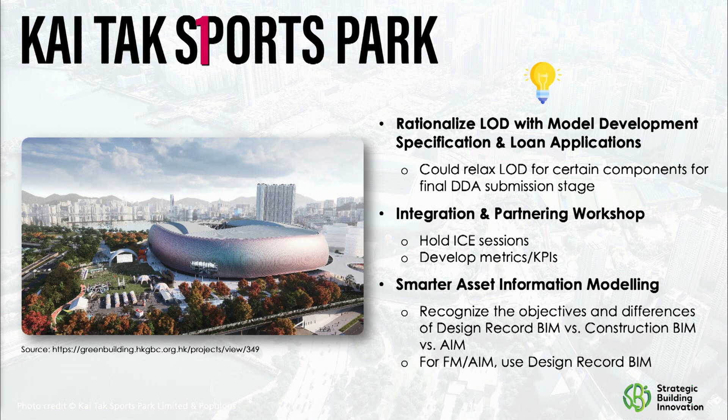One thing that should make this community proud is that when my team stepped in to meet with the project director of the Kai-Tak Sports Park project in Hong Kong, he did not take any of our courses, but he came into the room with the IPD book by Martin, by Dean, by Atul, by Howard, telling us how not only did he follow it and read it, he's actually embracing it. The book was with him in the trailer. So that was very, very impressive.

But for this kind of project, which is 4 billion US dollars, working with hundreds of consultants from Australia, the US, and across Asia, there was still quite a lot of challenges in terms of production. So what our team ended up doing was really help them understand that the owner had come up with too lofty, too ambitious requirements for the level of development of the production schedule.

And in the end, we were able to see that they were able to gain some VDC benefits, which you can read right here, through automation, through better production planning, and of course, good use of BIM.

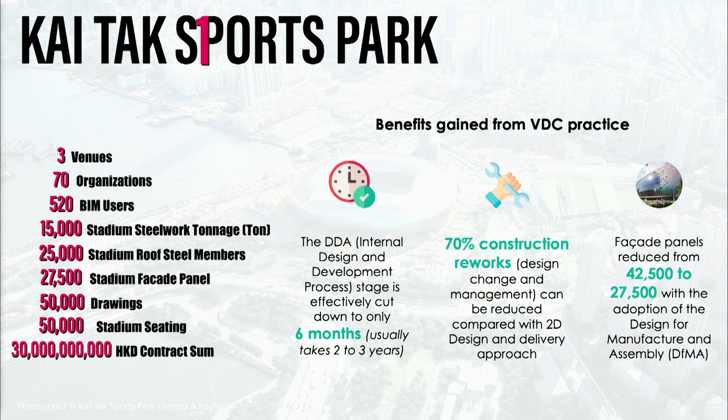Next slide. And what we found was that it was very important for us to have a session with the government agencies on this 30-year design, build, and operate job, and be able to articulate what would be the client objective, the project objective, how we can make it understandable, not just what the original consultant wrote a few years ago about the lofty ambition of the project, but how to really make it a smarter stadium project.

I still remember working with Jim back then on the California Academy of Sciences project. There was not much definition about LOD, about reliance of BIM. So Jim, reflecting on the last 20 years and looking forward, what have we learned?

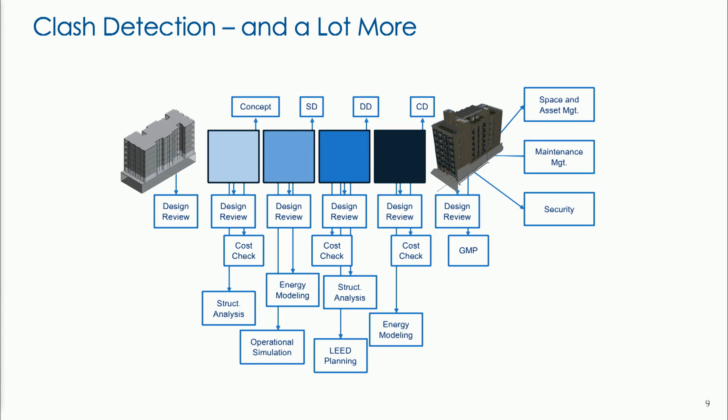And the first people to adopt it, at least in the US, were the trade contractors, because they saw this as a tremendous way of coordinating our work. It worked much better than the old superplot method. It worked well enough that I was working with Webcor, the general contractor on this project at the time, and shortly after this project, a couple of our trade contractors came to us and said, if you require all the trades to produce 3D models like this, we'll give you a lower bid. So money was already talking.

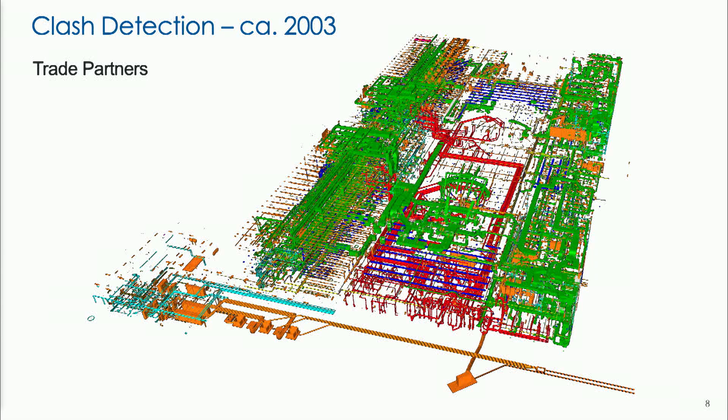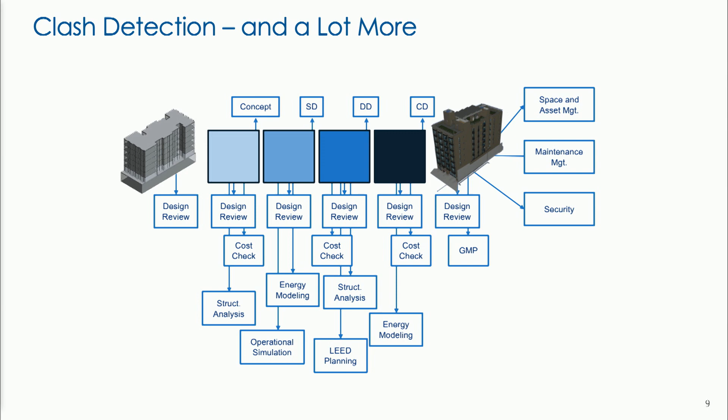Obviously we've moved on. We're doing a whole lot more than clash detection now. There's various simulations we're doing—costing, scheduling, operations, and so on.

But can we really rely on these models? If I'm a builder and I get a model from the architect, can I build from it?

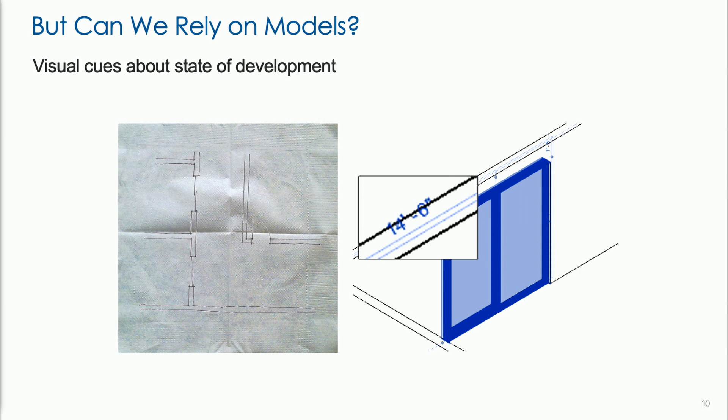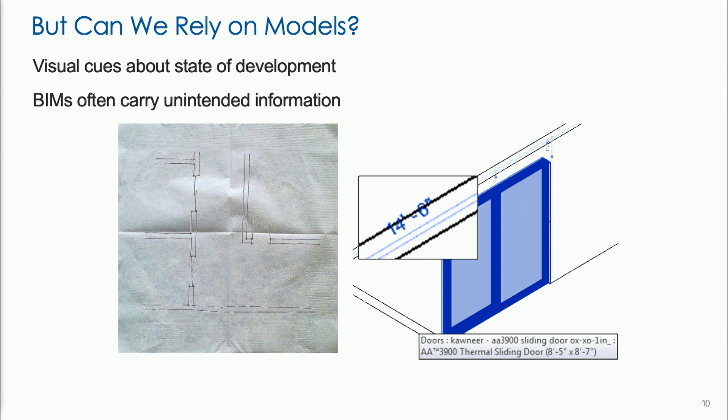And this is a BIM problem. We didn't have this problem with drawings. One of the major problems we ran into was that we lost the visual cues on the state of development. In drawings, if the thing looked like the thing on the left, we knew everything was approximate. The problem with models is that whether we're at the napkin stage or 100% CDs, it always looks like the thing on the right. I can measure the location of that door, but if we're at the napkin sketch stage, that location is probably going to change. They often carry unintended information—I probably grabbed that door out of the library just as a placeholder, and it's going to change.

So the response to this has been, when somebody hands a model over to somebody else, they put this disclaimer on it: it's for reference only, you can't rely on it. Really the theory behind that disclaimer is some of the information is not reliable, so don't rely on any of it. When we got hold of this in the AIA Documents Committee, we developed a specified use approach—basically said, yeah, some of the information is not reliable, so only rely on what I say you can, for the purposes I say you can, and to the degree of precision I say you can.

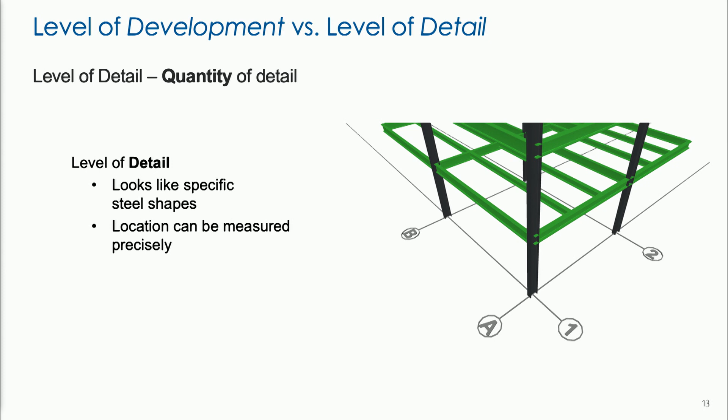And that's when the AIA Documents Committee developed this idea of level of development. The difference then is level of detail is really the quantity of detail—how much is there. But this thing on the right has a high level of detail. It looks like specific steel shapes—probably is, because I probably grabbed them from a library, didn't build them myself. I can measure the location precisely, but have they been engineered, and are they in the final locations? I can't tell by looking at that model.

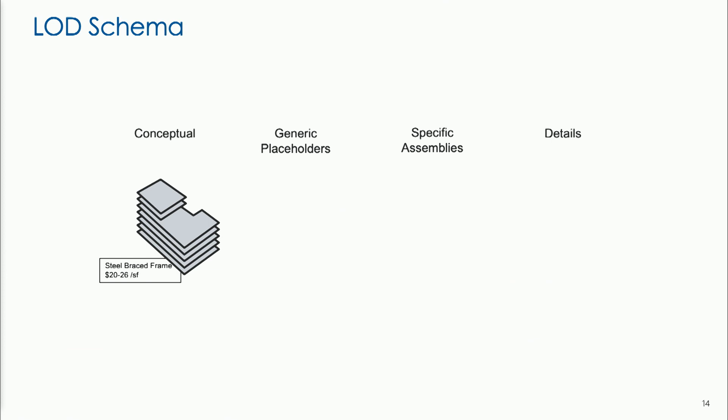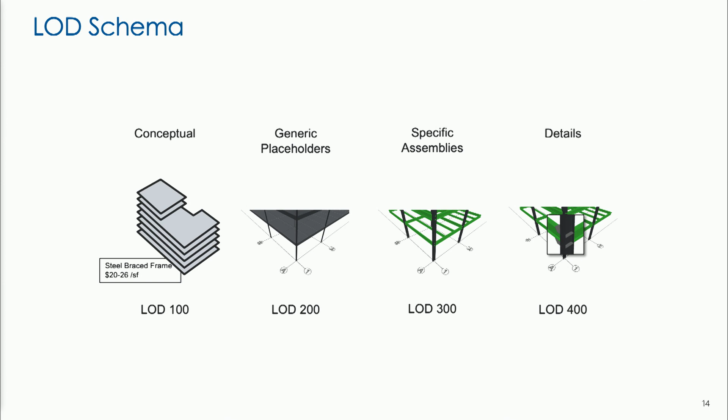So things progress through the design process at various rates. The structures usually lead everything. Things like interior casework bring up the tail end. But they all tend to hit common milestones. You start with a concept, put in some generic placeholders, swap those out for specific assemblies, and some of them you take to shop drawing level details. So we labeled these milestones LOD 100 through 400, and now we have this schema that represents the reliability of the detail.

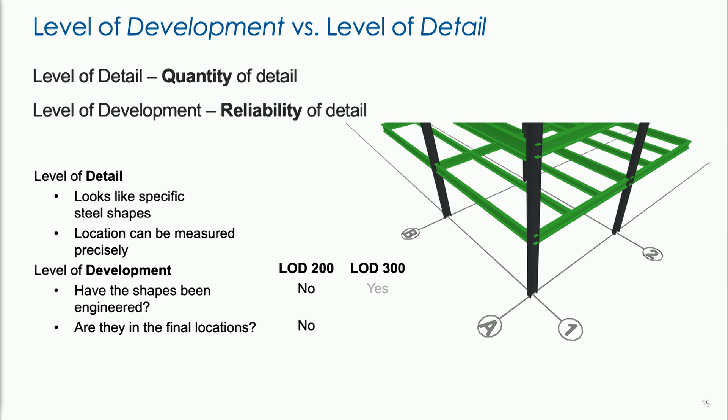Level of development then answers these last two questions. At LOD 200, the answer to both questions is no—they haven't been engineered, they're not in the final locations, so I can't rely on it for that. At 300, the answer to both is yes.

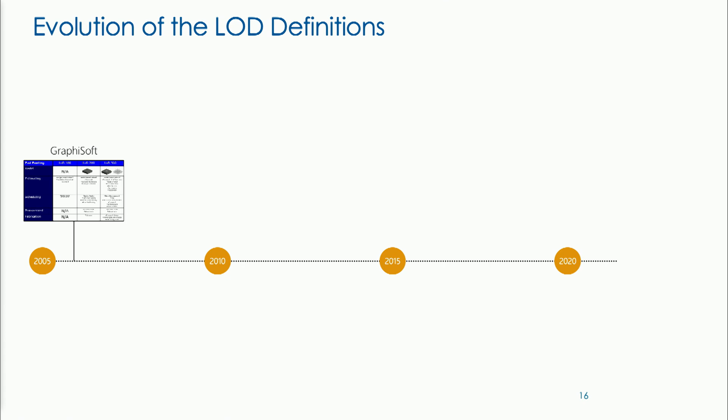The evolution of these definitions was, first of all, Graphisoft came up with this level of detail scheme, and it went on to, when the AIA got a hold of it and morphed it into level of development, a couple of updates, and then the BIM Forum, an interdisciplinary group in the US, got a hold of it and made this LOD specification, which we'll detail in a minute.

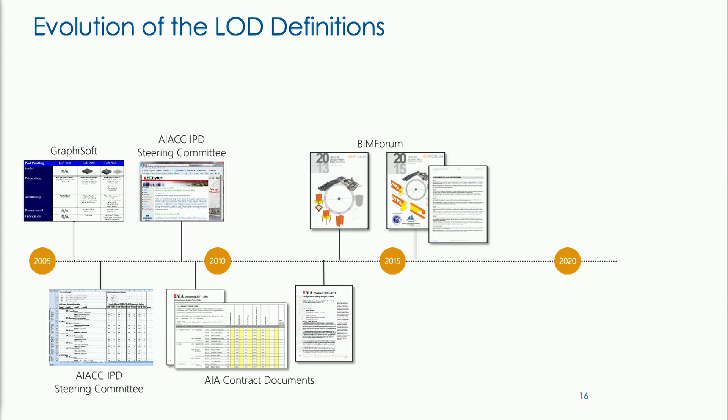One of the major developments was that in 2015, the BIM Forum took this and interpreted these definitions. The big one was that we said, okay, since 300 is specific assemblies, we can measure it. Caused a lot of heartburn among architects at first, but those that really saw what was going on bought into it.

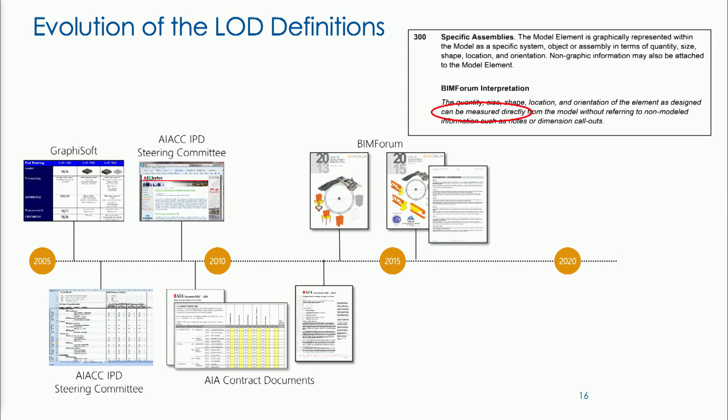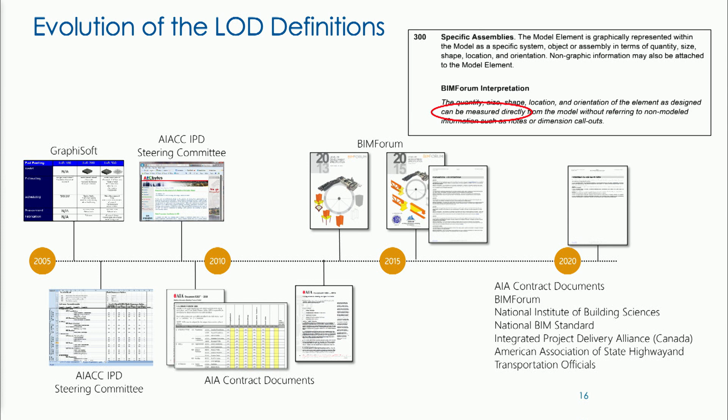Last summer, we got together a wide group of industry organizations, redid or updated the LOD definitions, and basically baked these BIM Forum interpretations into them, including the measurability of 300.

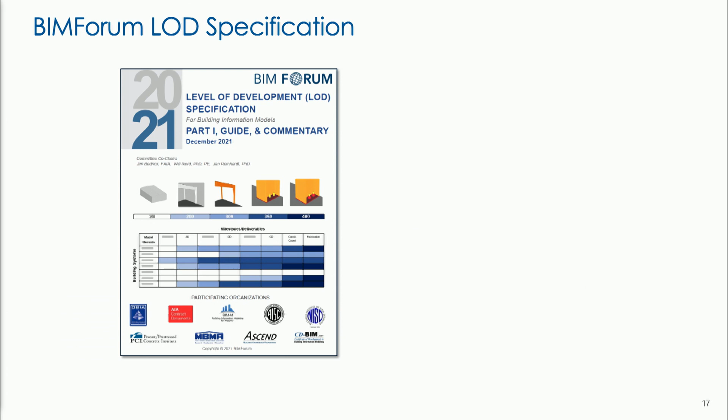So, all right, this is fine. We've got these definitions, but still, what I think of as a 200 door, an LOD 200 door, might be different than what you think, okay? So the BIM Forum got together and developed this specification, basically as a dictionary. This document interprets various and sundry building systems at the different LODs. So now, if I want certain information on a door, I can look in here and say, okay, that's LOD 200. I can tell somebody else that I want LOD 200 doors, and they can look in here and know exactly what they need to give me.

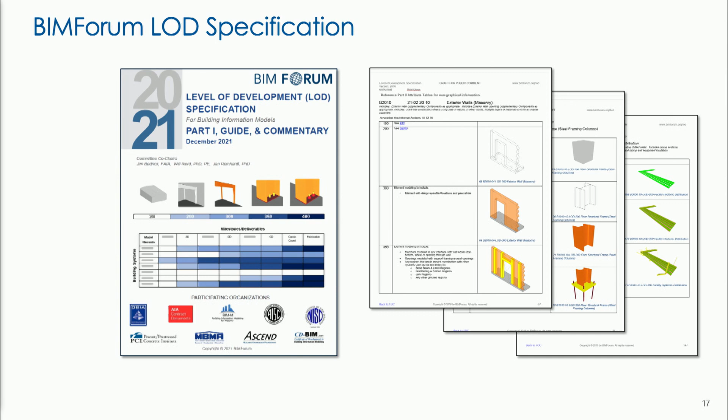A couple of years ago, this started to go global. NBS from the UK came to us. They said, we think you've got the best LOD framework and specification. We have a breakdown system that we are going international with, Uniclass. So we want to map your specification to Uniclass, which we did. In 2020, that mapping came out.

Now, the spec and the definitions and the whole framework of LOD has been a tremendous support for collaboration. Well, what's next, as far as reliance on models goes?

Well, how about models as contracts? If you look at the evolution of contract documents, a while back we were doing drawings, separate drawings. You move a window on the plan, you got to go through half a dozen drawings and move it there.

We progressed to taking drawings as views of the model. Now I move the model, the window in the plan, it moves in all those other drawings. The thing is, if you look at that small apartment building, 152 of those sheets came directly from the model. Why are we composing all these sheets?

When we took this on in the AIA Contract Documents Committee, we started in 2013. About half the group said, okay, well, we can look into this. The other half said, no, never. Over my dead body. We're never going to make that model a contract.

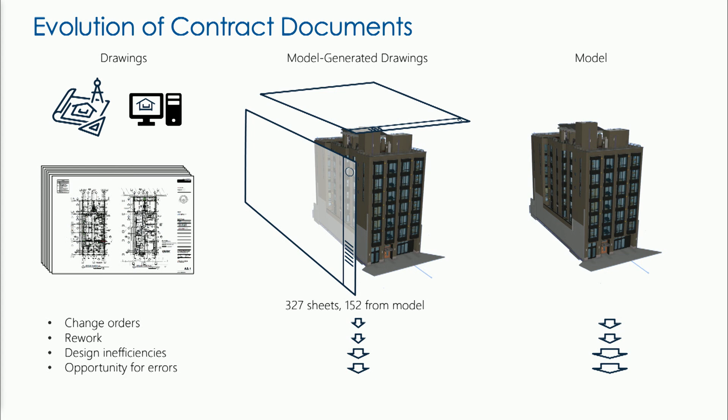One of the people who was most dug in against the idea wound up being the lead of the document that supported it, because he took a look at it and he said, you know, this is going to save me a lot of time. I don't have to compose these sheets anymore.

And the thing is, it's not the next step, it's happening now. Especially in the horizontal industry, it's happening so much that they have their own acronym for it, MALD, Model as a Legal Document. Four states are planning for it, four are conducting their first pilot, and six have designed and constructed a project using models as contracts.

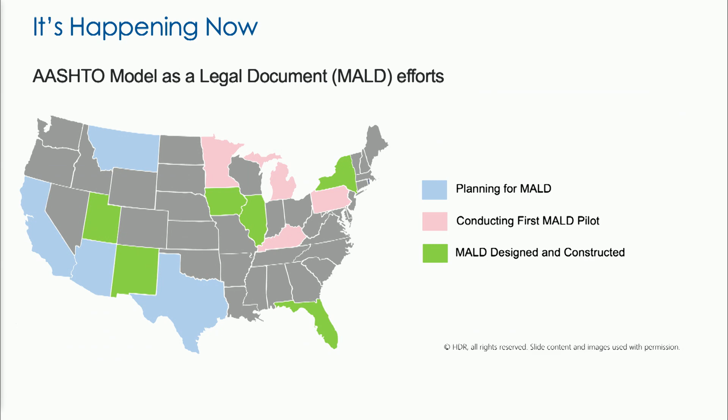It's also now gone into the vertical sector, and last summer, AIA came out with the latest BIM exhibit, and it specifically supports the idea of a model as a contract.

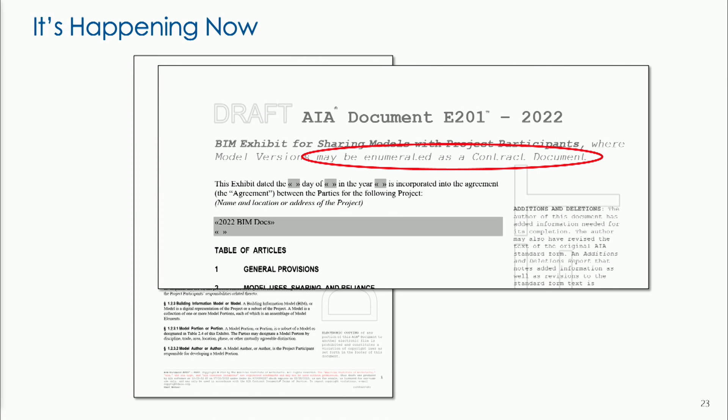Okay, now scaling up BIM to GIS. One of the work that we're doing at SBI is integrating BIM and GIS, but not using native formats like Revit or Tekla, but we are using open formats like IFC and CityGML.

The main reason is it's usually the government agencies that need integration with BIM and GIS, and they tend to have, in the future, probably in a Hong Kong case, 300,000 models, because they do have a lot of facilities in the city. And it should be speaking in the same language. If some models are built with a Tekla language and some models are built with a Revit language, it will be very difficult to do anything and query information.

So you need a consistent format. That's why we are using OpenBIM and open standards for the GIS as well. And on top of that OpenBIM and OpenGIS platform, what we are doing to improve the quality of the BIM is also using Building Smart's new machine-readable specification called IDS, Information Delivery Specification.

The intention is you can create a model checker within Revit, for instance, but you cannot really export that rule set to a different software like ArchiCAD and use it again. So the intention is to make this rule set interoperable between different BIM authoring tools, so you can use it for multiple purposes and by multiple stakeholders.

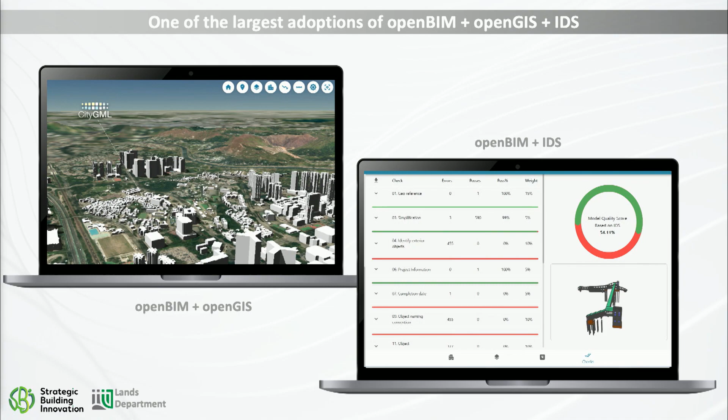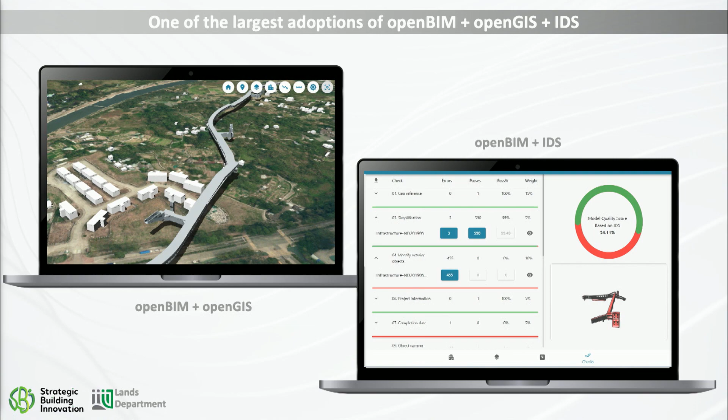So this is the prototype platform that you're seeing on the left side. It's done with our Dutch partners, and this is using open standards pretty much 100%. We have IFC in here, we have CityGML for the GIS part, and for data streaming over the internet we use GLTF, Cesium, and 3D tiles, which are also open standards. And on the right side, that's the IDS checker, if you will.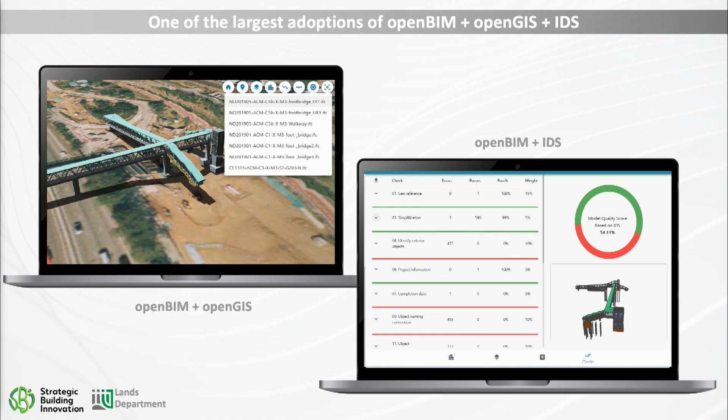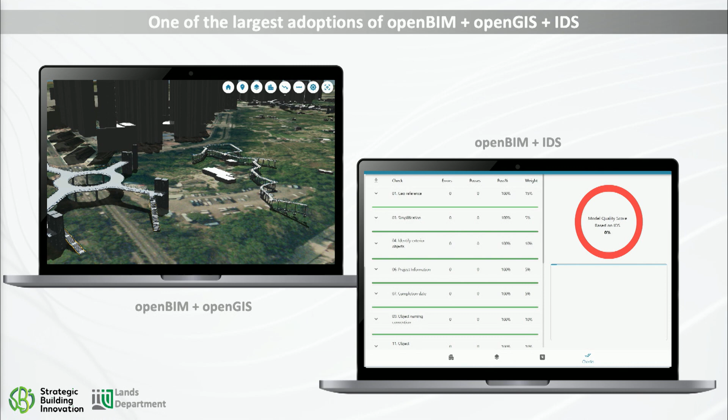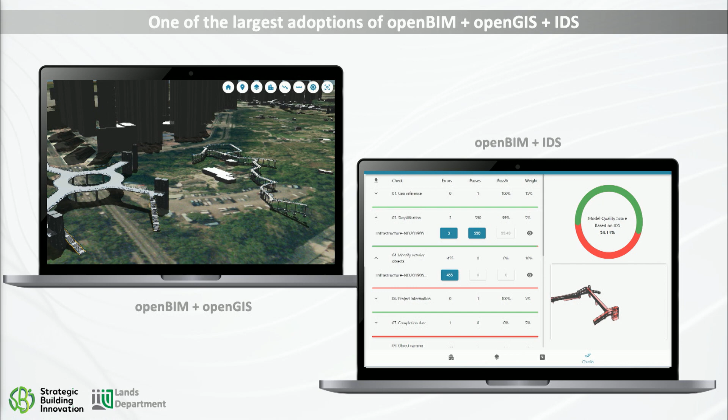It's like a model checker that's using the machine-readable format IDS XML. Here, the information requirement for the government agency is on a high level, like whether you have the georeferencing information embedded in the BIM or not, and whether the model is simplified or not. Because when you have 100,000 or 300,000 models in a platform, it should be very light and maneuverable. So simplification is another example of a requirement for this project.

So some metrics in this project: we used 7 open standards and developed 10 IDS file formats for different checking purposes. We also tested that IDS checker, or basically the model checker, with 149 IFC models. Of those 149 IFC models, 102 were infrastructure project models. And when we ran this IDS checker, on average it took only about 12 seconds, so it was very usable.

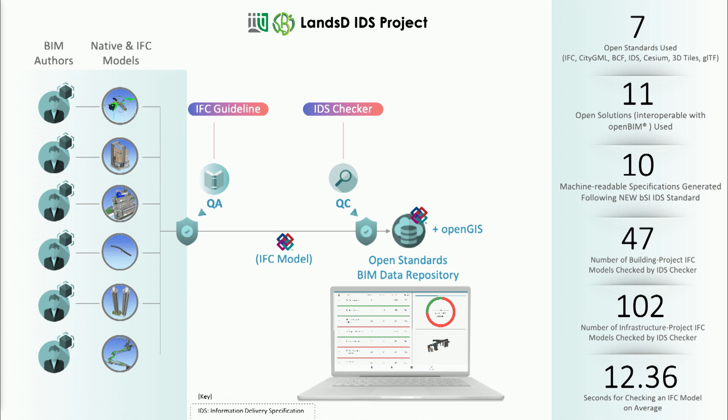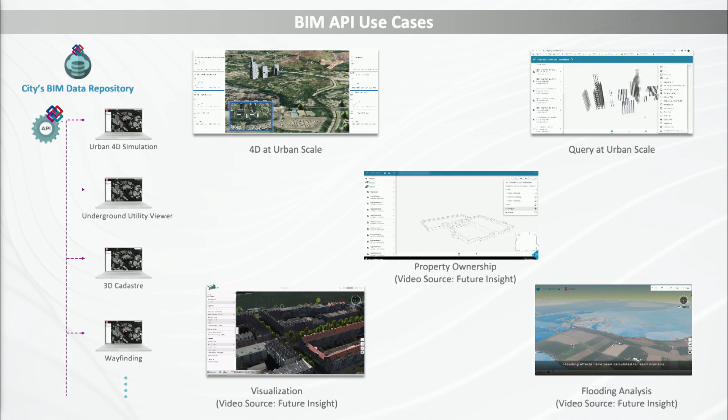Moving forward, what we plan to do is address the fact that a lot of people tend to think IFC is an archiving format, but we are also trying to leverage IFC-based APIs. So some of the examples that you see here are all software developed using IFC-based APIs.

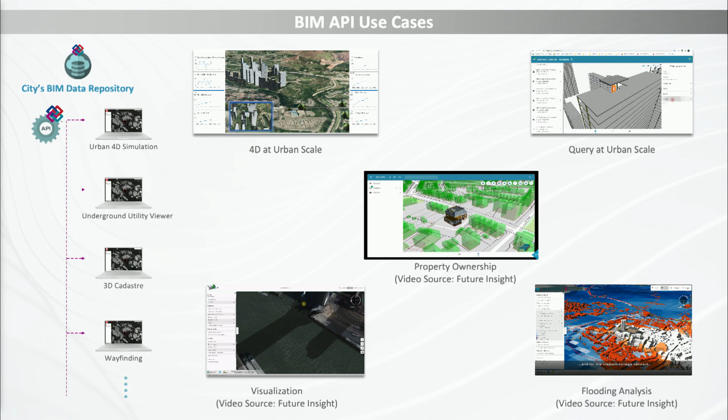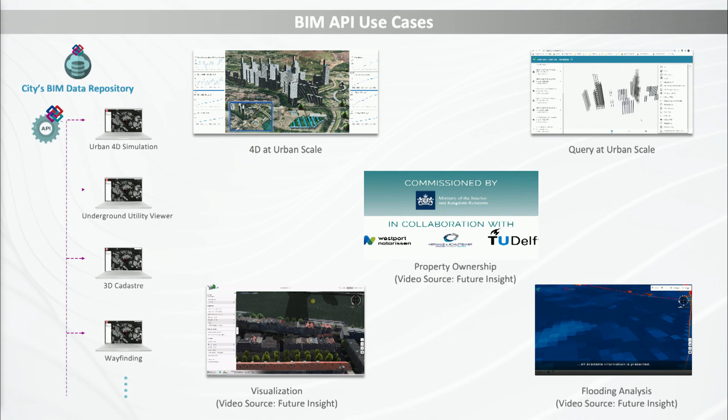The 4D simulation case on the left side was inspired by research work done at CIFE more than 10 years ago. And you do have other use cases like advanced query, querying against the city model as a whole, and also flooding analysis, which integrates with another flooding analysis engine by using APIs, which is an IFC-based API.

Moving on to the production management side of the VDC framework now. So this is actually work that stemmed from CIFE Stanford. And the planning level that we are interested in is similar to what Lupo talked about when he discussed lean to field. So it's not about master scheduling or phase scheduling, it's more about the scheduling or last planning system for the site people, like the foreman.

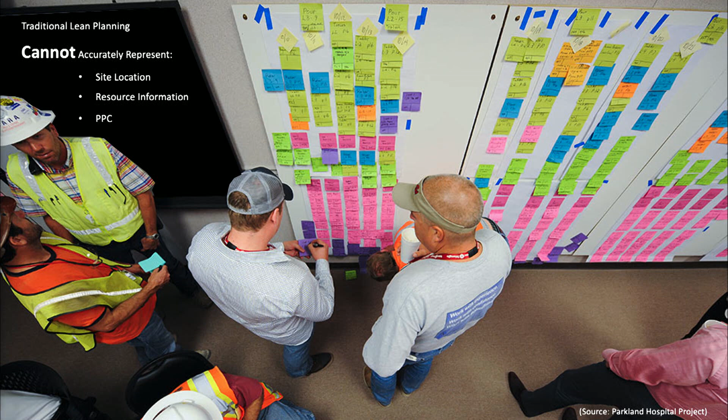Typically what we see in the industry today is this type of physical board with sticky notes. Those sticky notes will tell you what the foreman has to do on a certain day. It does have some information, but it lacks detailed, precise information in terms of resources, like quantities and whether the equipment is available or not. Also, the PPC is calculated on a very rough level — they just count the number of sticky notes, not really based on a BIM-based quantity type of metric.

So this is the research prototype that was built at CIFE. We do have LOD 400 BIM here. Of course, we are not asking the industry to go with LOD 400 for all of their projects, but if projects do have LOD 400, they can leverage this information. So we're using LOD 400 and building a production unit boundary, an imaginary boundary, to encapsulate the work scope of the foreman for that day. By using that, we can also quickly generate daily work orders, which have precise and accurate quantity information coming from BIM LOD 400.

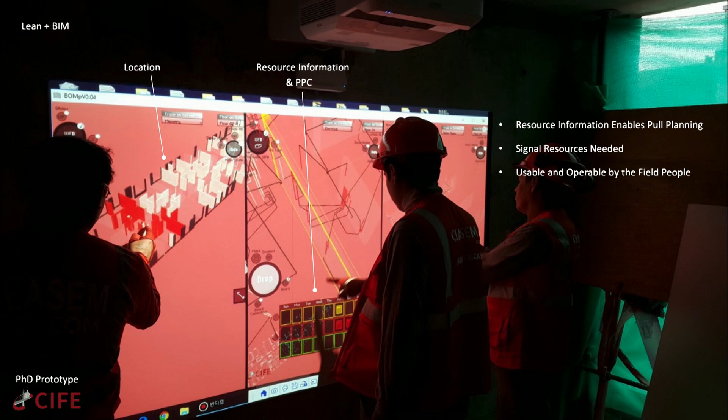During the study here at Stanford, we did test this out in North America, South America, went to the Middle East, went to Europe, and did a lot of test cases. At SBI, we extended this and now implemented it in Asia, so we did test this in Hong Kong as well.

It was a high-rise building project with the curtain wall trade as the focus of this test run. For the curtain wall trade, we implemented this for 6 months and generated 143 daily work orders. On average, it took around a minute to generate a single daily work order.

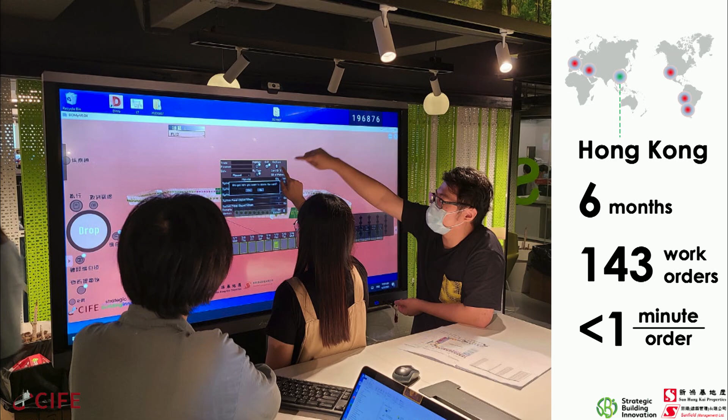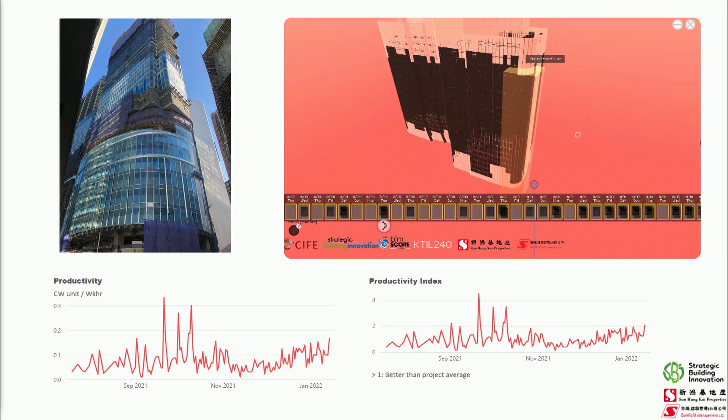So this is the 4D simulation of the work done in Hong Kong. This is a high-rise building project, and each of the black cells you see is a curtain wall unit. At the bottom, you can see the productivity and the productivity index metrics. One thing you can see is that variability of productivity reduced over time. Whether that's due to this platform or software, I don't think so, but this software does help you visualize that variability over time.

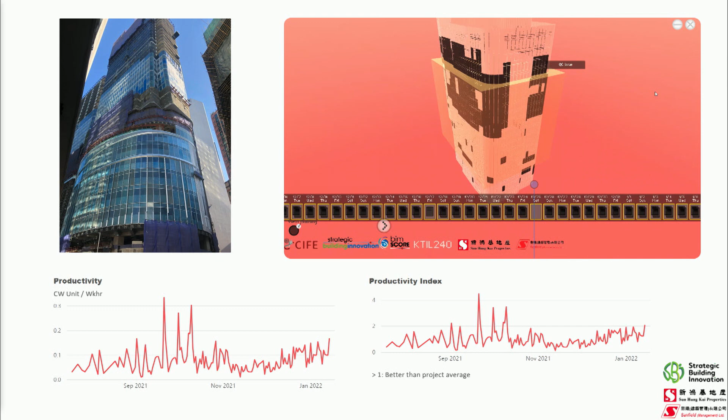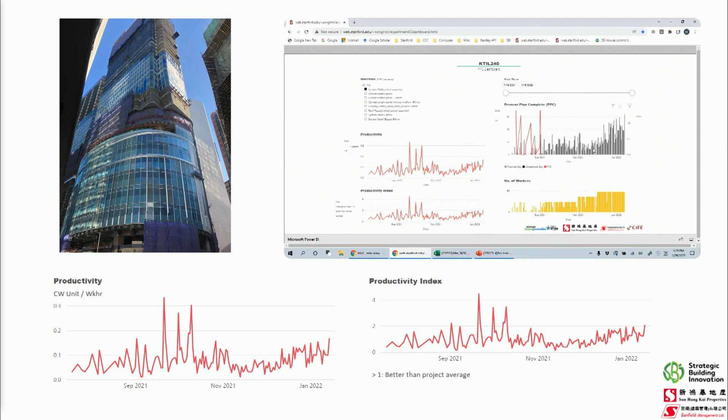In addition to tracking the work done at the construction site, we also try to track the supply chain - tracking whether the prefabricated unit has been completed or produced at a factory, and whether it has been delivered to the site or not. So that part of progress tracking has also been implemented in this case.

Some room for improvement: a lot of the success of this depends on cooperation from the site. At this project, the site people and the foremen were not fully cooperative. So one way to work around this is to build into the information requirement that subcontractors and foremen should be inputting this type of information on a daily basis. Because if it's not in the contract or information requirement or specifications, they tend to overlook this type of work.

Another room for improvement - we did manage to help foremen generate these daily work orders quickly, on average in a minute or so. But a lot of things we've been hearing from foremen is, can we automate the update of the progress? We do have a lot of technologies we can leverage today, like RFID and computer vision, so that it can automatically detect the objects or elements installed at the site.

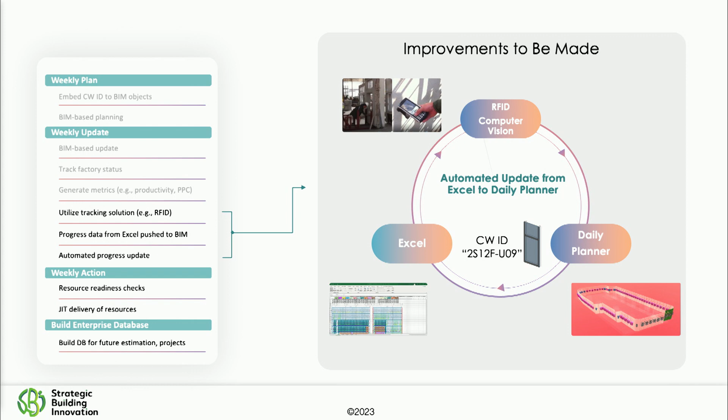So the next task we're planning to do is think about whether we can integrate these types of industry technology that's already out there - the RFID and computer vision part of it. I'd say this is not so much a research question, more of a development question we can look into, because we see a lot of technologies already out there we can adopt for this purpose.

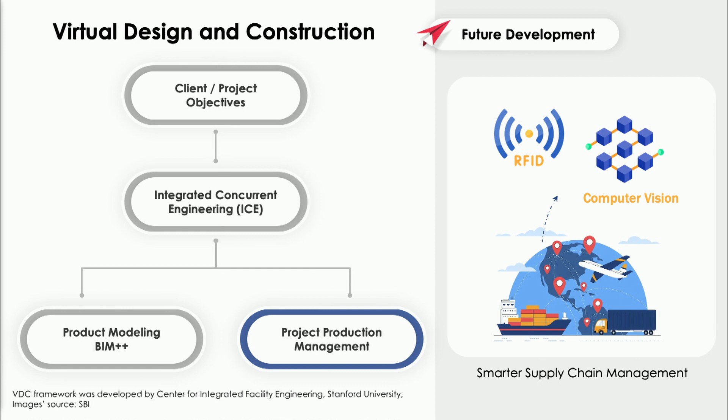So next, Kelvin, we have the ICE part of the VDC framework. Passing it back to you. Next slide, please. Thank you.

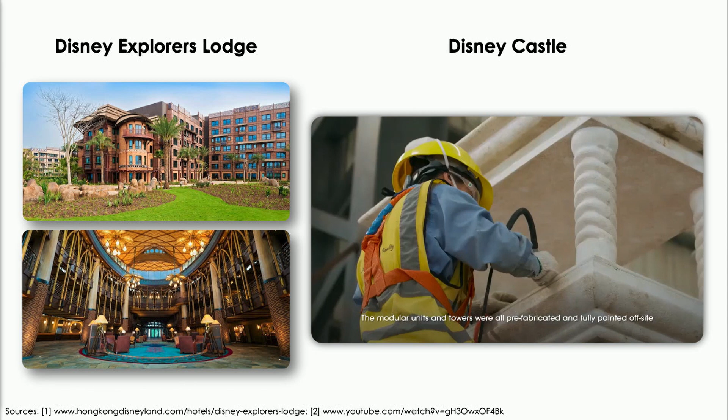In the early days, about 10, 15 years ago, there were a number of Walt Disney Imagineers who came through the CIFE certificate program in VDC. Many of them later became champions of how to apply ICE VDC in a number of global Disney projects.

SBI also wants to take these two examples, the hotel project and the castle project, that were just reported by Disney Imagineering President Barbara Bouza at the AIA conference just a week ago in San Francisco.

With the hotel project, our team at SBI teamed up with Disney and designed the ICE session for 12 sessions. About 100 people would fly in from around the world to the same Disney ballroom and hold ICE sessions, in some cases for a week long.

Going through some of those, we would keep an eye on how engaged people were, how much they contribute - going back to the earlier CIFE framework of are they spending more time explaining stuff, or are they spending more time really contributing and collaborating and making good decisions? And also per decision, what did it take without the ICE session?

About 15 days, $7,500 per issue, 58 hours per issue. But also looking at what were the critical path items, what were the commitment reliability levels, who had the worst commitment reliability - in some cases it was the owner themselves. So let the metrics, the public explicit metrics, tell the story, and so we can all actually see the reality.

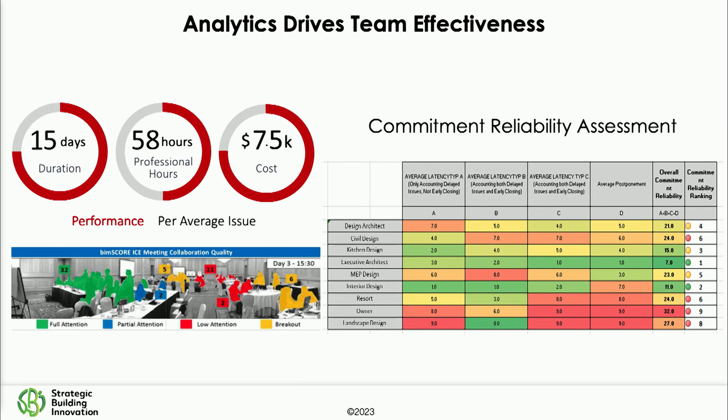Next slide. Of course, ultimately the client objective is to really let the guests have happy moments in their facility, in this case, and fun.

Another important part is getting the chef to come into the ICE session and understand what that means in terms of their future kitchen.

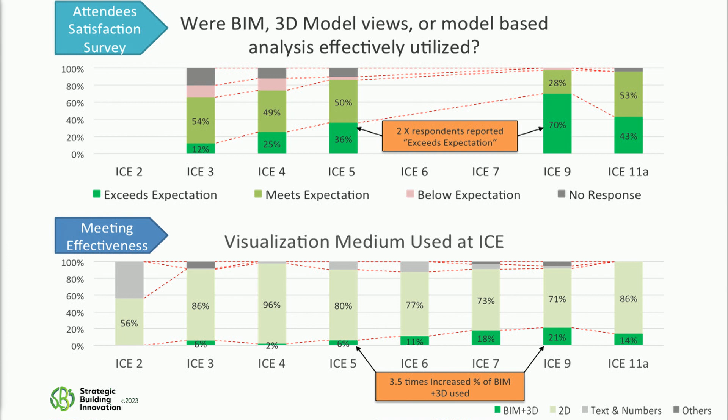We also track how these ICE sessions trended over time. Some of these were from quite a few years ago, so BIM was actually only at the main stage for about 21% at maximum of the total week-long session. But we did see a correlation of how effectiveness and satisfaction were positively correlated with increased use of BIM and 3D-driven review processes.

And then moving on to the castle, that was built during COVID, and actually the Disney Imagineering president made a really quite nice story at the AIA San Francisco. DPR, GSA, among others, were there too. So when we came into that 2-day ICE session, we were planning to only have

only like a page flip by the design manager who did not take the VDC course from Stanford. So teaming up with her, we totally changed the pre-design, what the agenda was, how we could make it efficient. In the end, we were able to identify a major outcome: the Disney castle would have no fireworks during construction, when all the operators were thinking there would still be fireworks and the show would go on.

That was a major aha moment generated from the ICE session that allowed us to preemptively solve that. So in the future, with AI, with ChatGPT, how we can make some of those ICE sessions more informed, to make better decisions and alternatives, is certainly something we are looking at.

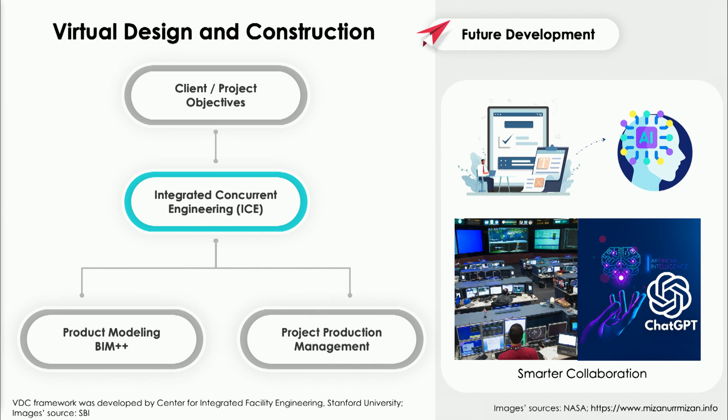So in the final segment, in terms of metrics, right, we have been working with Asia Pacific Economic Cooperation to look at how to measure that across 21 economies, all the way to working with Disney and looking at how to measure particular parts.

So one case is that we have been working with a 118-story building, one of the 10 tallest buildings in the world, the ICC. They've been in operation for 10 years now, and we are looking at how to leverage VDC to really improve the leasing and the operation.

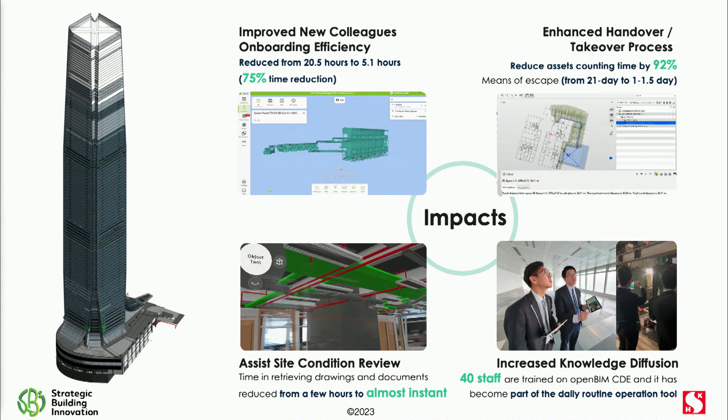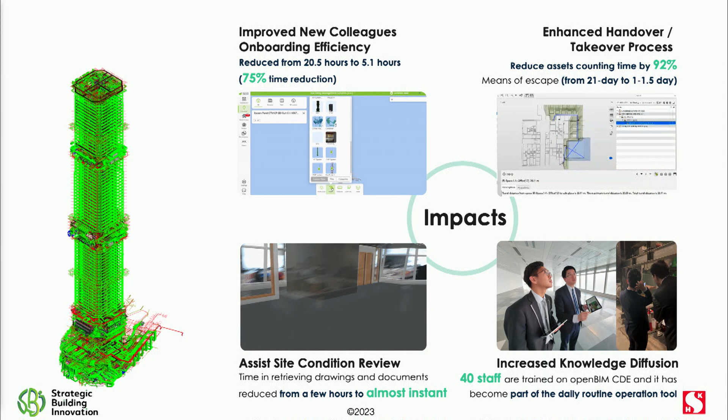So in these cases, it's about really empowering the clients to make the handover and takeover process for the tenants 92% more efficient in terms of co-checking, and also a 75% efficiency gain with the handover process and the onboarding process.

So those were some of the ongoing lessons learned. And even though, yes, there was a BIM being built and so forth, it's a lifelong journey to work with those tens and tens of operators.

Working with APEC, made up of 21 countries and economies, 60% of the GDP, we work with them reminding them that you need to look at the status quo. I think, like what Peter was saying, we need to look at the metrics, the status quo, and then we also capture from 21 countries what the green metrics were, and how we can use VDC to empower those and lead to smart city development in APEC.

Some of the final slides reflect back 10, 12 years ago. Martin may remember we were going to Disney Shanghai. Many of the design team, construction team were new to VDC. Within one project's time, the Disney Castle in Shanghai won some global awards and they never looked back.

Similarly, with Singapore, I think we've gone through 9 courses with Singapore leaders, government, private industry, and that is now becoming a policy in Singapore to work with VDC, to work with DFMA and beyond.

And then, more during COVID, over 200 professionals, including those responsible for 60% of the $330 billion construction volume in Hong Kong, have taken the VDC course, even during COVID, online, self-paced, and are now coming up with requirements that every 6 months they need to submit KPIs to report on client and project objectives. So the journey is still on.

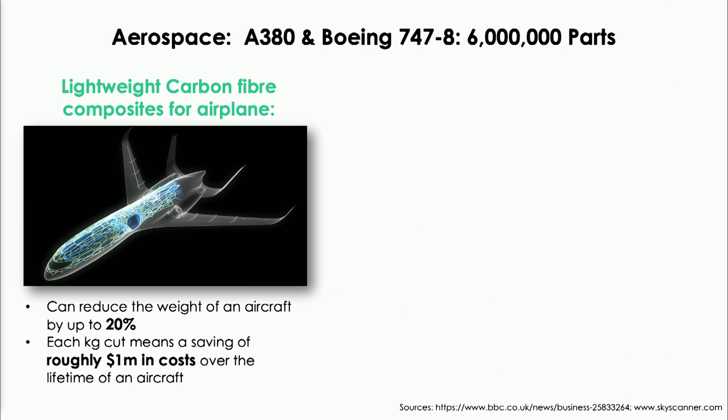And so, in closing, there's still so much we can learn from other manufacturing industries. If Airbus and Boeing can not only report on the number of parts, but can even tell us that 1 kilogram would equate to $1 million of life cycle cost, or that by flying 2 minutes slower we can save $13 million of fuel, what can we do more to leverage on this kind of data analytics?

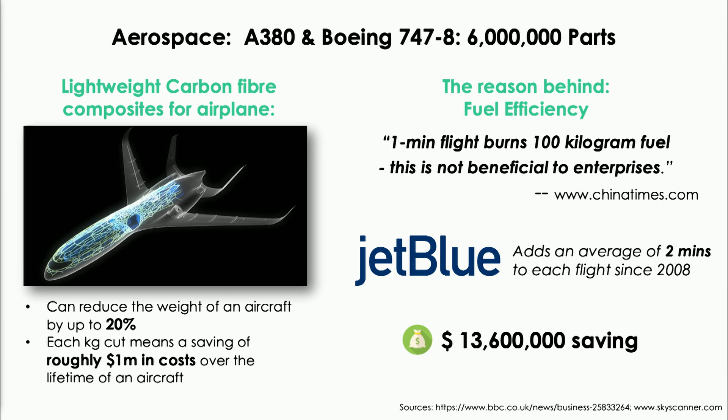We are still not anywhere close in terms of part type optimization or construction—don't just go fast, what if we go slow a little bit? How much more sustainable can it be? Do we have those informed decisions?

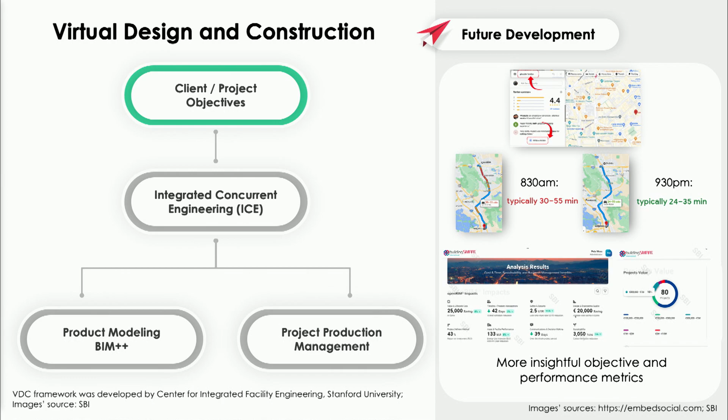So in the end, we are also working with Building Smart International to see if we can come up with a global platform to report on business values, sustainability, productivity, and other values. Actually this year, if anybody may be going for the BSI awards, some of those designs, some of those metrics are in place. So there's also another opportunity for CIFE and Building Smart to team up together to look at that from the education side and also from the metrics, celebration, and analytics side. So with that, I'll pass it back to Stanford.